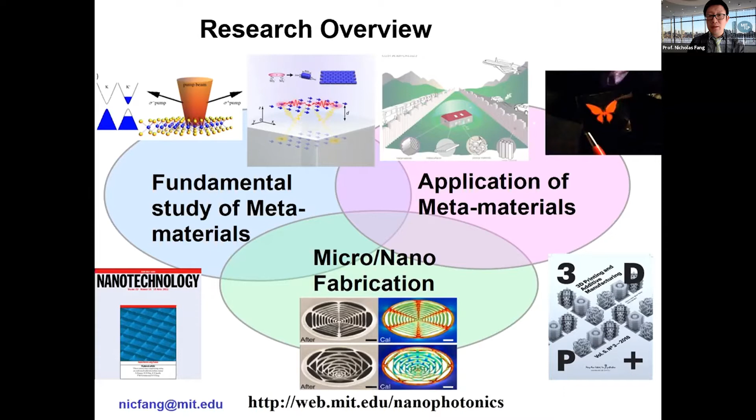Through the process, we also explored and developed technologies, including micro and nanofabrication tools, that bring different materials—metal, ceramic, polymers—all together to enable different optical, acoustic, and thermal applications embedded in those functional structures.

So the talk I'm giving today will be focused on our ongoing effort that not only provides those acoustic, light, or electromagnetic functions, but also considers the importance of load bearing or survival in extreme environments such as thermal shocks, fatigue, flow, and so on.

If we are able to really combine the physics of both—the wave engineering or wave physics domain—together with the requirements of load bearing and other thermal management requirements, then it's possible to broaden the scope of metamaterials for important areas such as RF domains. We heard in the previous talks about applying, for example, conformal antennas. We are also very much interested in medical implants as well as high throughput gas or liquid filtration.

So how do we bring this together into now a structural element, inspired by, for example, the 2D spectrum space that is enabled by blending 4 different colors, CMYK, in the inkjet printing space.

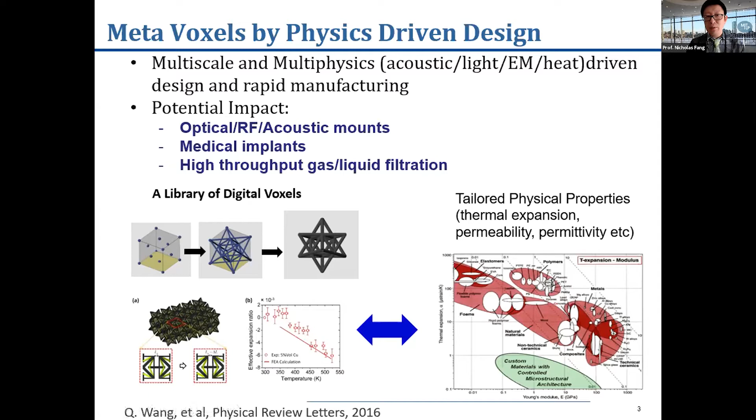If you're interested in some of the details, the following paper in Physical Review Letters highlights some of our earlier attempts at that. I would say that lightweighting is a very promising direction.

Taking, for example, fiber composites, or some of the foams you might have been using for antenna applications, it's really important to recognize that the connectivity of those lightweight elements is actually essential for their mechanical, acoustic, thermal properties, and so on.

Our earlier effort was made possible by two rising stars in the field, Professor Rayne Zheng, now at UCLA, and Professor Howon Lee, who just moved from Rutgers to Seoul National University. They examined particularly these unique structures called octet truss elements.

If you build an octet truss lattice made out of tiny micro beams and structures, a surprising fact emerges: you could keep their density as low as that of aerogels. In other words, their permittivity will be comparable to air.

On the other hand, when you try to bend or compress those materials, you see that they can actually be as stiff or as tough as engineering rubbers. So for the same density as aerogel materials, we are enabling more load-bearing capabilities in such unique lattice-based metamaterials.

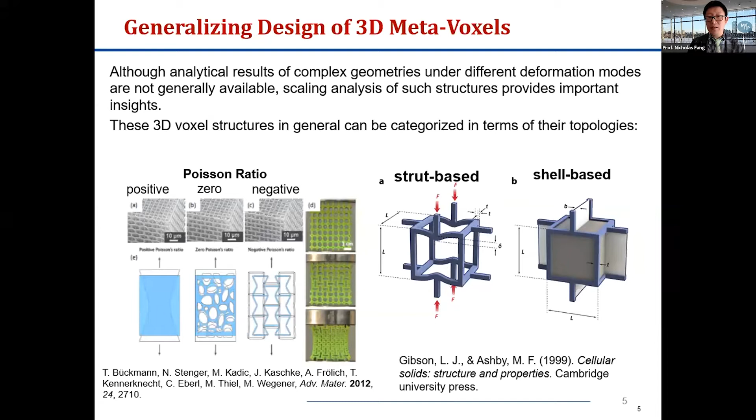So one of our PhD candidates, Huifeng Du, is taking a brief step to generalize such a concept in collaboration with a research group, Professor Rashid Abu Al-Rub's group at Khalifa University in Abu Dhabi. They looked together at this unique lattice structure, so-called Triply Periodic Minimal Surfaces.

This is actually a structural element found widely in bicontinuous phases. Many biological materials incorporate such geometry. And it turns out that if we try to examine the mechanical behavior of such elements, you can...

...group them into different deformation modes that basically distribute the load by skeletal bending, stretching, as well as sheet bending modes. And each of them has different scaling laws in terms of reducing, for example, the weight or volume ratio of individual elements.

Interestingly, this scaling effect can also be deduced not only in the elastic domain, but also in the case where the structure is under large deformation, for example densification as well as plastic failure.

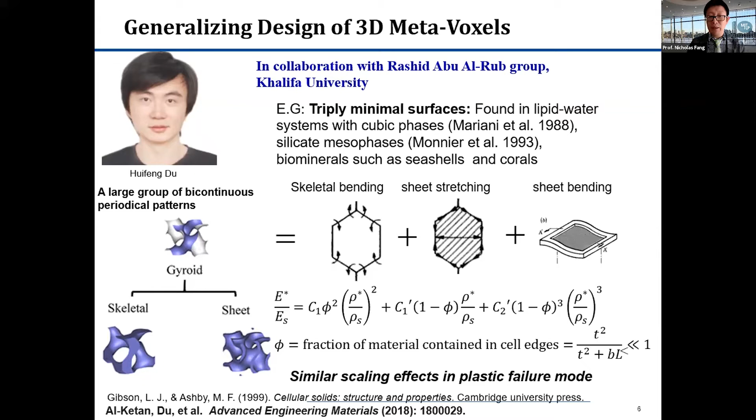So we found a very nice library now in the scale of micrometers and millimeters. And our next effort is to try to expand that into smaller dimensions.

And in the long run, we expect those structures will be not only lightweight but also tough, so that they can survive under severe environments, including impact resistance as well as cyclic thermal shock.

A very important attribute of such lightweight substrates and materials is found in the transportation space. In the previous talk, we heard that we can use fiberglass absorbers, for example, in support of conformal antenna design. But in the acoustic domain, there will be very similar needs.

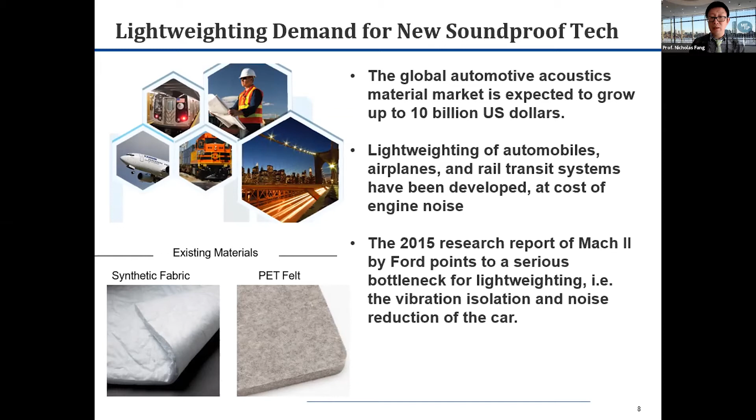So in collaboration with Professor Minghui Lu's group at Nanjing University, we identified a unique case of metallic foams. In this example, the foam itself already provides substantial strength so it can work quite well for load bearing. But unfortunately, the acoustic absorption is not something the metallic foam is capable of.

On the contrast, when you examine acoustic absorbers from natural fabric and natural materials, you see that many of those fibers and fabric materials carry a feature size or dimension that is quite different from what you observe in the foam lattices.

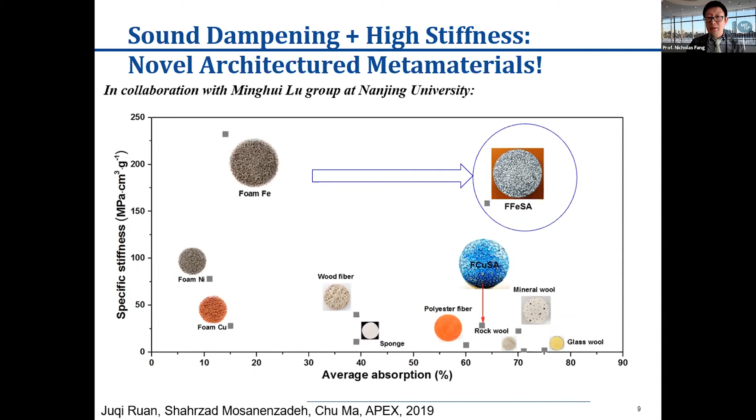So this is actually just the very beginning of the story. We are looking into many important challenges in terms of sound dampening and air permeability and so on.

We had great opportunities to participate in ERC collaboration as an international member, and through that we were able to host research collaboration. Professor Jesus Carbajo San Martin from University of Alicante came to collaborate with us on thin and air permeable microperforated acoustic absorbers, and we see that it is indeed possible to reduce the overall thickness by leveraging unique channel designs, as well as increasing the acoustic boundary layer thickness in those fine features.

Together with Professor Zielinski's group at IFTR in Poland, we also formed round-robin studies looking at different acoustic absorbers formed by the same geometry but using different additive manufacturing processes. We see there are important features related to surface finish and surface channel tortuosity, coming from different materials and fabrication processes related to additive manufacturing.

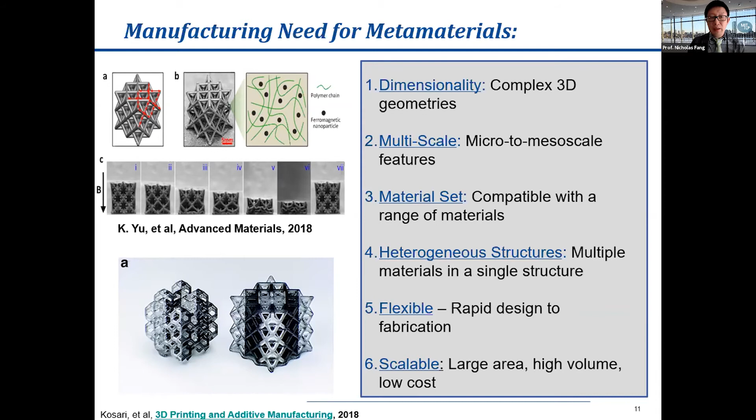To meet that kind of stringent requirement, we have been evaluating and comparing different available microfabrication and additive manufacturing tools currently available. Some of you may have already been using direct extrusion or inkjet-based technologies for printing antennas. Those technologies are quite friendly in terms of fabrication of large substrates, but they often suffer or become constrained in terms of feature resolution.

So for the case of acoustic absorbers that we are looking for, the feature size will be smaller than 50 micrometers, and sometimes this is not feasible for extrusion-based tools.

On the other extreme, we see many exciting research efforts emerging using the so-called two-photon lithography method, pioneered by Professor Martin Wegener's group at Karlsruhe. However, associated with these fine lines that are subwavelength in the optical domain, you also see requirements of finite sample size, sometimes on the order of millimeters or less.

This is because generating each of the pixels requires substantial movement and coordination of the material solidification, which makes these tools yet to be developed for larger scale and cost-effective evaluation. So in that domain, we have been pursuing so-called projection microstereolithography tools that bridge the gap between extrusion-based and two-photon lithography-based rapid prototyping and manufacturing processes.

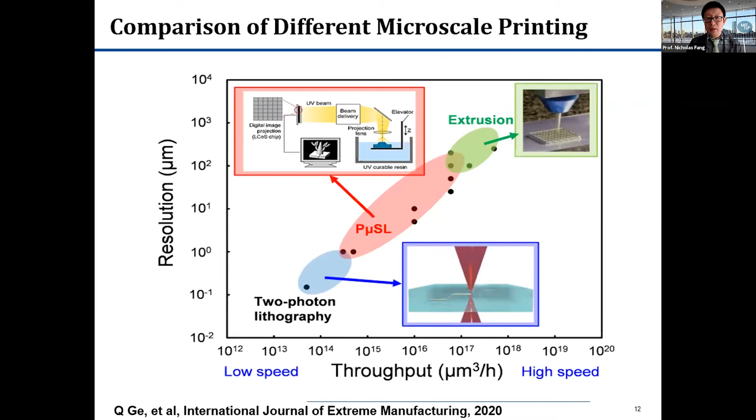So how did we do that? We find there are a couple of challenging issues that limit the scalability of this photonic-based process. One of them is associated with the adhesion and friction that are required to move the fluid. The thinner the fluid, the higher the viscosity or pressure drop that we have to combat with.

In collaboration with Professor Yanlin Song's group at the Institute of Chemistry, we are able to minimize the surface adhesion between the spreading of different liquid layers. By doing so, we can now generate a ping pong ball size of, for example, these buckyball structures in the order of a few minutes.

Similarly, we can now also minimize the use of some of the expensive functional materials, such as ceramic resins. Some of those compounds are actually hundreds of dollars per gram, so we have to really minimize their waste. We see that such improved surface lubrication also gives us a new avenue to achieve that goal.

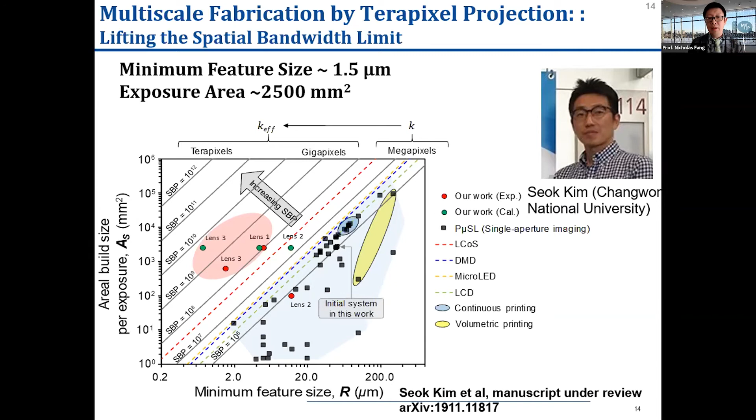How did he do that? He leveraged the use of lenslet technologies, micro lens arrays. Today it's possible to obtain large sheets of micro lenses containing individual imaging units of 100 micrometers and smaller.

By coupling that with digital displays, which already contain megapixels of display, it is possible to take a modulation so that the projected image is the convolution of the two imaging elements. This allows large format while maintaining fine features, and also enables aperiodic designs such as rotation and twisting in large metasurfaces or metastructures that can be readily prototyped now at thicknesses of centimeters and above.

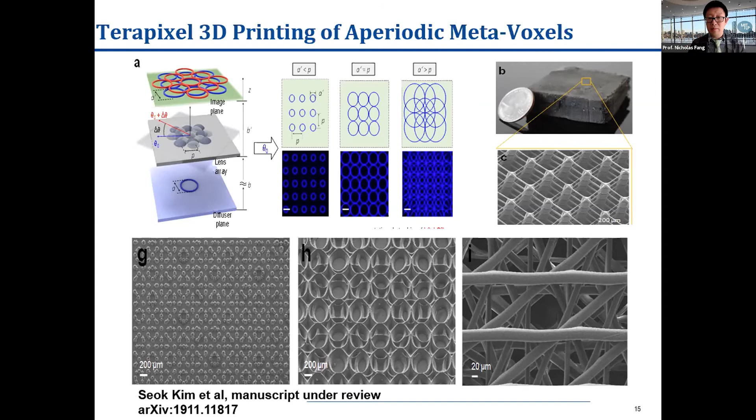We've also been actively collaborating with different field experts. By printing and incorporating different mechanical elements, each tailored with different stiffness and compliance, we are now able to generate a completely new engineering scaffold that can support the growth and proliferation of important vital tissues.

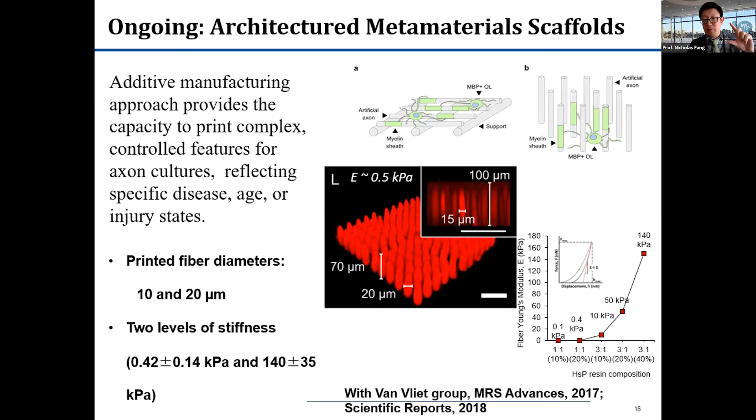By tailoring the photonic exposure of individual fibers, we are able to form pillars smaller than 10 micrometers in diameter and heights of 100 micrometers and beyond. By doing so, we can form both horizontal and vertical pillar arrays that serve as a conduit for both axon and glial cells to migrate and even wrap around those pillars.

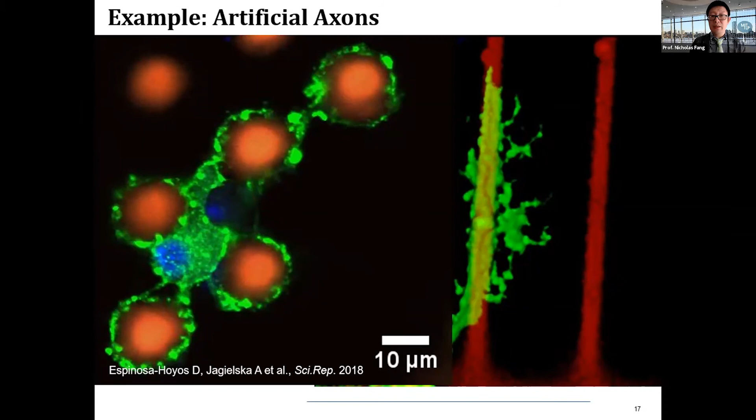For the first time, we see that such myelination recapitulates some of the important developmental biological processes important for brain formation. We look forward to more important field studies using these tools to identify and isolate biological as well as mechanical cues that support neuron formation at a chip level.

Our preliminary results already show that a factor of 6 improvement can be achievable simply by changing the electrode orientation into the 3D lattice domain.

We have also been actively looking at opportunities to leverage thermal stress using the light density and confined architectural structures I mentioned before, while maintaining high surface to volume ratio. By doing so, we expect the ceramic catalytic converter can reduce the pressure drop, in other words enable high throughput waste gas processing.

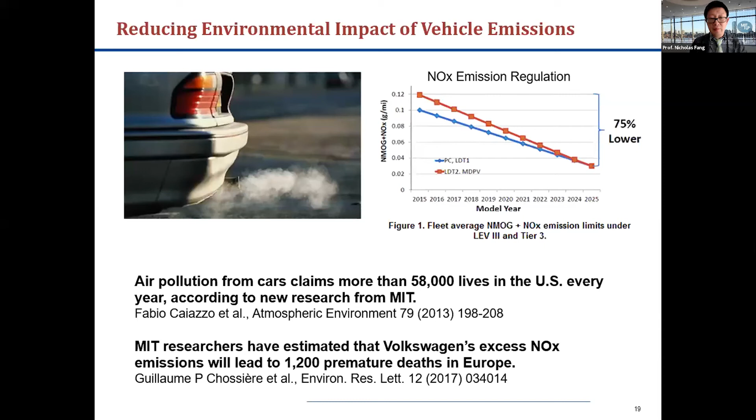Why is this such a difficult problem? It turns out there are already commercially available catalytic converters in the market. But when you turn on the car, the first few cycles of the engine start are really the problem of the so-called cold start gas release. At that time, the catalytic converter is not yet at the right temperature, and it cannot efficiently convert the waste gas such as carbon monoxide or nitrogen oxide.

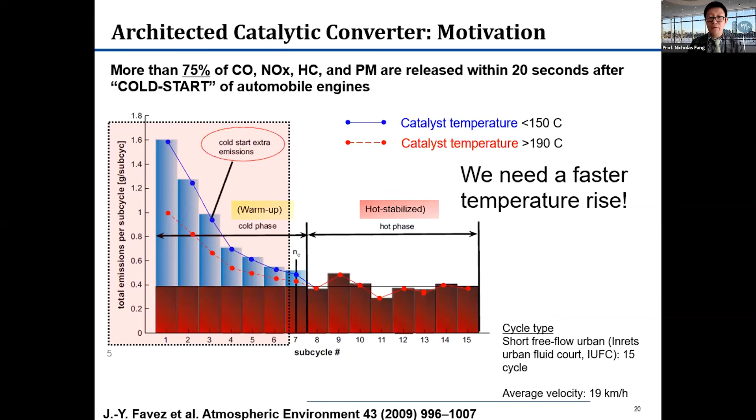So how do we address this particular issue? It turns out that within that beginning 10 cycles, we really need a substrate that can heat up in a few seconds. Here we show architected ceramic materials, for example the hollow tube ceramic.

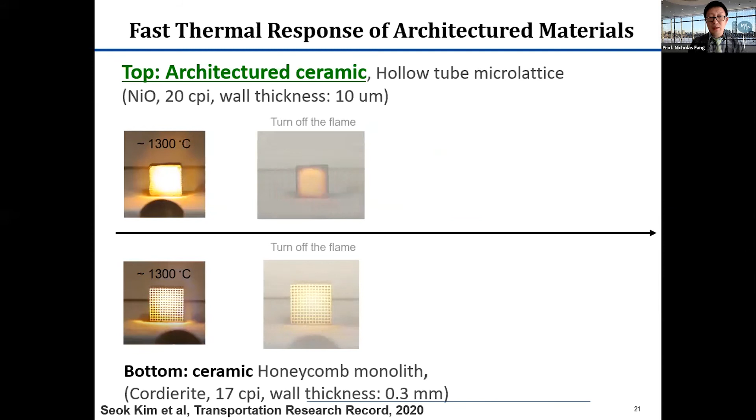When it is subject to immediate heating using, say, a high temperature flame, you see the inverse process. Once the flame is turned off, after 2 seconds the lattice already starts to cool, and at the 4-second range it goes back to ambient temperature.

On the other hand, if you look at the case of the monolith honeycomb structures, the increased thermal mass in these honeycombs is responsible for a longer time response. As I mentioned, this is really the limiting factor for such a converter to address the cold start problem.

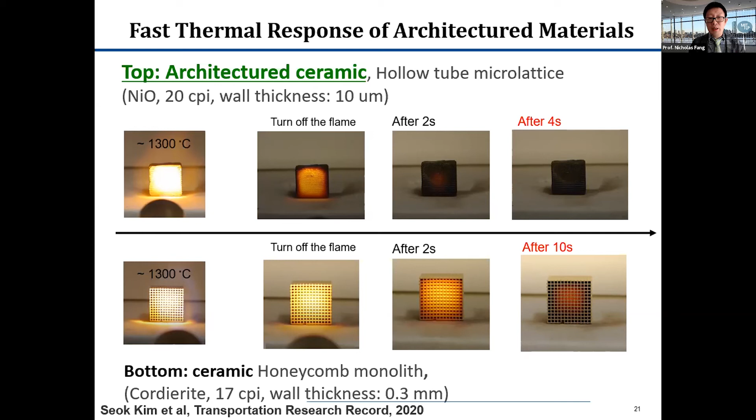So we do see that architected ceramic now provides a promising solution to increase the filtration efficiency and reduce, for example, pressure loss in this challenging environment.

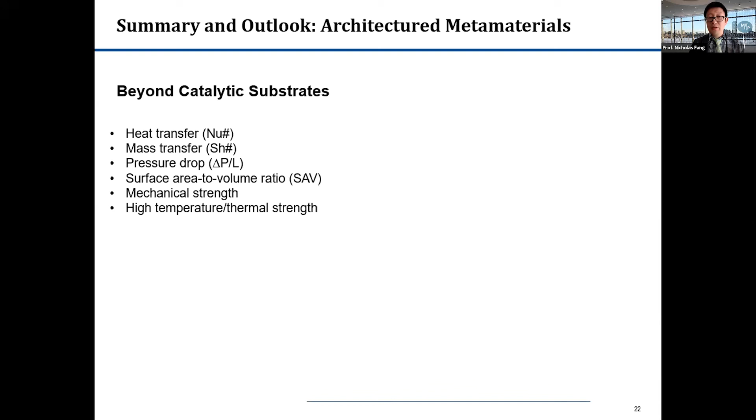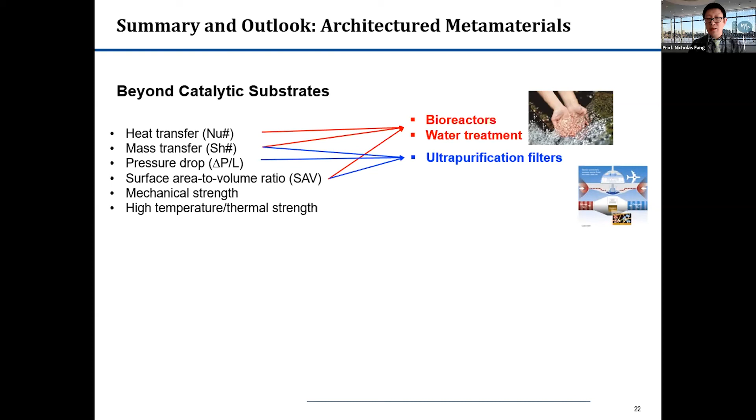When we look at architected metamaterials and structures, we see that not only does it reduce the use of critical materials for lightweighting, but it also provides opportunities to increase heat transfer, reduce pressure drop, and increase tailored mechanical strength and compliance.

In the future we think this may find important application areas in filtration for gas and water, and also maintaining important thermal management in confined spaces. This could also be very important for antennas and other light emitting devices.

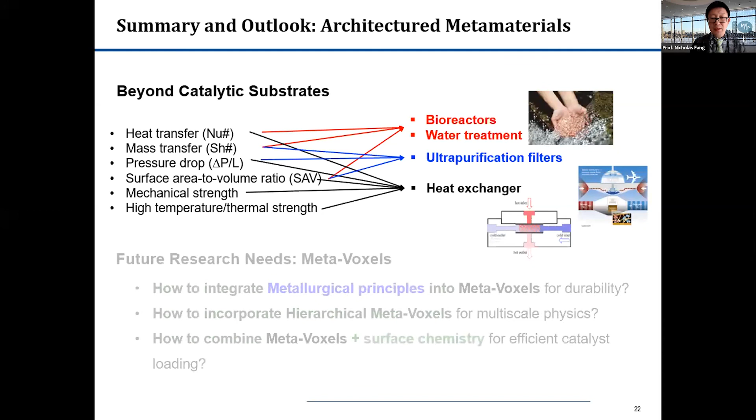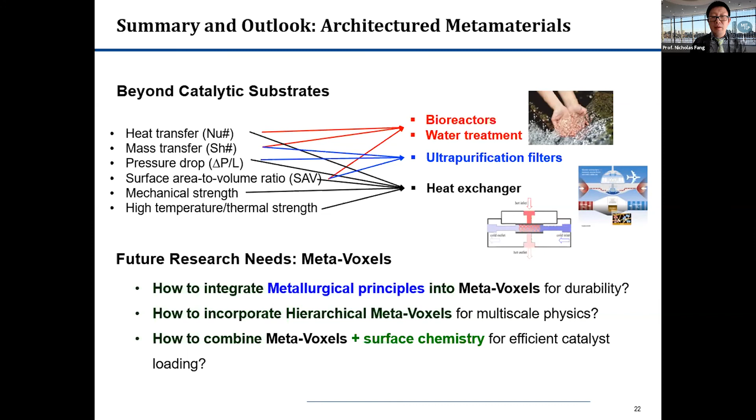And yet there are many open questions in the manufacturing and design space that we look forward to exploring through collaborations across different disciplines. With that, I'd like to thank my students and academic collaborators.

Last but not least, international industrial collaborators as well as funding agencies. Thank you very much for your attention.

Thank you very much, Professor Fang. Very interesting talk, very interesting demonstration of capabilities. So we have a couple of questions. I think we can go quickly through it.

This constitutive model actually depends on what particular material we are building the lattice with. For metals, we are looking at elastic plastic behaviors of, for example, thin film metal materials. For plastic materials, we have been using Neo-Hookean, but I think it's very feasible to apply other models such as the famous Arruda and Boyce models, for example.

And we have a last question here: is there a way to take advantage of the atomic lattice structure for the 3D voxels?